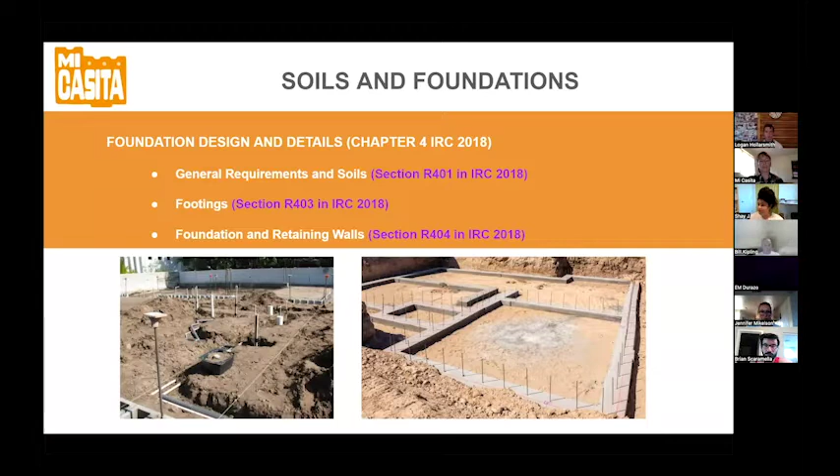So we're just going to go through this in sequence, more or less of construction, but also building code, going through the phases. You're going to start - everything you need to know about soils, footings, foundations and retaining walls is found in chapter 4. Types of wall construction are all in chapter 6. For homeowners, you don't need to know the details, but having a sense of what type of construction you want, having a sense of the basics helps with cost estimating - it just helps to have a pretty clear idea.

The more clear and dialed in you are of the picture you want will just help you understand quicker what it means in terms of cost.

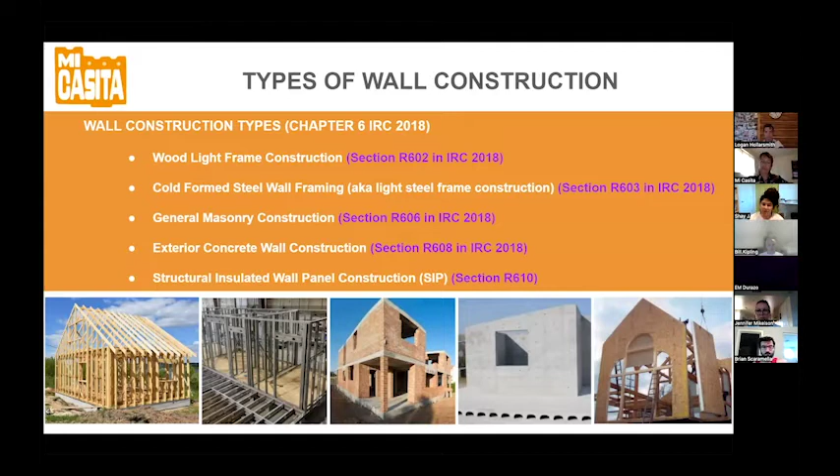For most people, the building code is arranged almost in order of expense. Wood light frame construction is by far the number one choice for everybody because it's the least expensive, the most widely used, and the system pretty much every contractor knows how to do. Anything else is going to be more specialty and a lot more expensive.

Then we have the appendices, and I wanted to mention these because there are some new updates to the code since 2012. We now have a tiny house appendix, which offers some really important relief for the building codes in terms of stairs, ceiling clearances, and lofts. It's really relevant to the casita conversation because a lot of people want to build under 400 square feet, and you really need those extra reliefs to make some of those floor plans work out.

We also have in the building code a section on light straw clay construction, which is exciting because this is a newer sustainable solution that's now allowable, at least in our jurisdiction. And we have straw bale construction also in there.

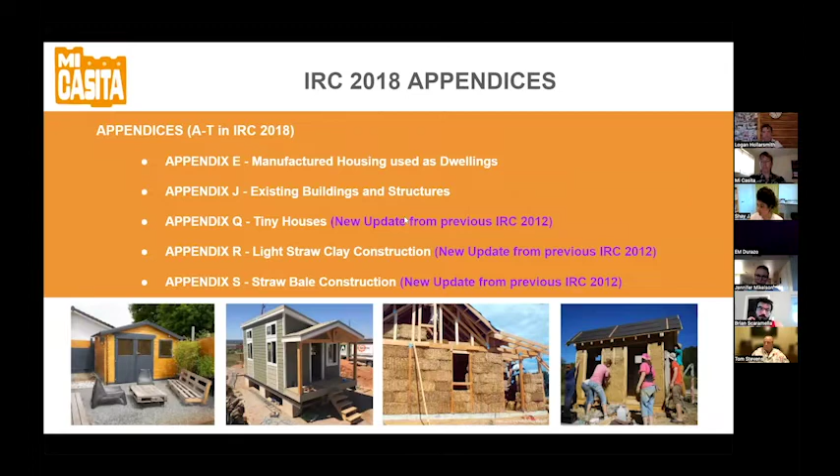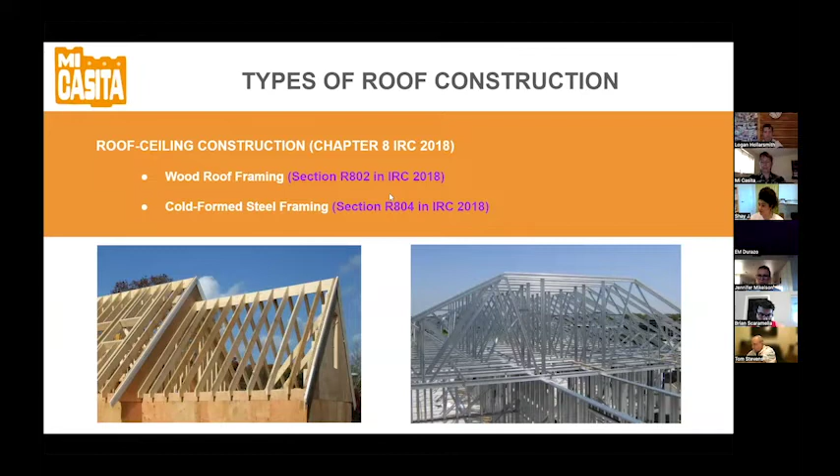For roof construction, at least in the residential code, you have the option of wood or light frame steel construction. Another really important thing I always ask clients when we're trying to nail down scope is what type of roof they want.

There are so many options available, but the least expensive is going to be the most simple. The most common in Tucson is either your gable roof, which is like the classic kindergarten drawing roof, or your flat roof or parapet roof in the Southwest style, where the walls come up and it's flat on top with the roof sitting below.

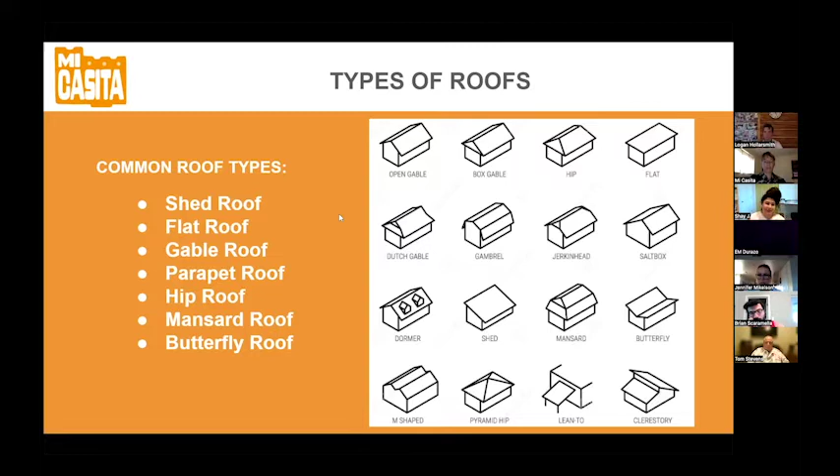Once you start getting into more angles like hips or mansard, it gets more expensive, and if you're budget mindful, it's probably not something you'll want to do. But every now and then I have clients who want something super specialty and unique, so then we'd look at those other options.

And then your construction sequencing - it's just good to have a basic understanding so you know what to expect as a homeowner, and what you're up against in terms of your site and everything that's going to happen.

You obviously start with your site grading and excavation, rough-in utilities go in, and you might want to be mindful of this if you're planning on doing the contracting yourself and need to schedule and call in inspections. This is all listed on the PRO website, and it all goes with construction sequencing.

Foundations, then you have your wall framing, your roof framing, then the sheathing goes on - this is specific to light frame construction, since that's going to probably be the most common type that people use.

Roofing - then once the building's more or less dried in, you start moving to the interior with the rough-in mechanical, doors and windows. Once the building's fully roughed in, you can lock everything up. That's when you really go into the finishes of drywall, cabinetry, carpets, paint, and all that.

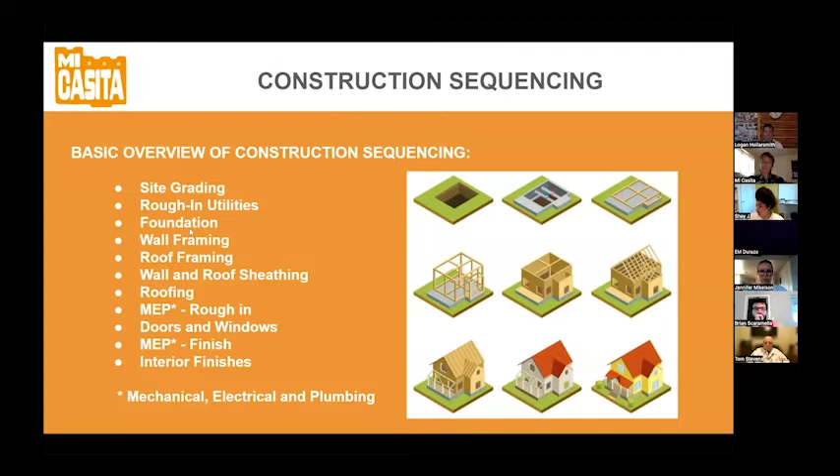And again, this pro website basically tracks the progress of your project. So whether you're a homeowner who wants to check in on how building progress is going, or you are the contractor, or however you decide to do your project, this is how you track the progress with the city.

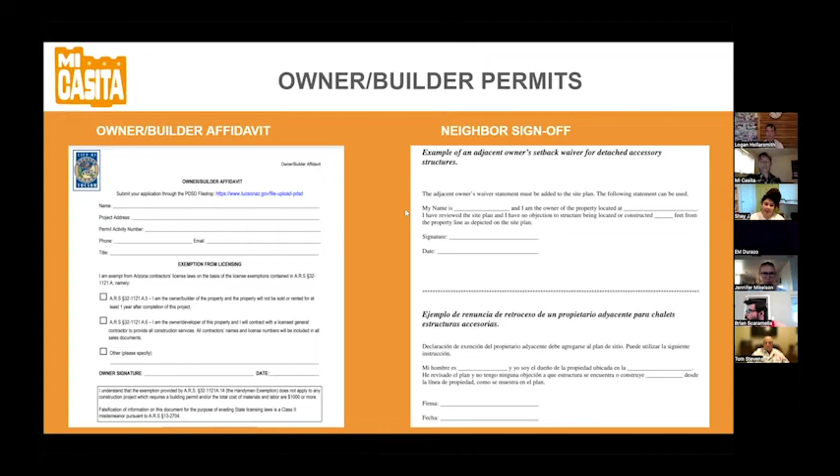Construction projects tend to be disruptive to communities, or they can be. Some neighbors find them disruptive. So it's just always a good idea to check in with your neighbors anyways. This sign off is specifically for that. And this is just a template. You could write up your own, but the city has this as an example.

And then as far as reducing cost and design, the biggest thing is to keep it simple, simple roof forms, simple plan geometry. Obviously the simplest thing to build is a box with 4 corners. You want to try to reduce wasted space in the plan. This is also really why it's great to bring in a draftsperson or architect, because they really know how to maximize your square footage and get the most efficiency out of your dollars.

Try to avoid specialty or novelty products. I get a lot of people call and ask or tell me, oh, I want to do shipping container construction. I want to, that seems like a really great idea and maybe more affordable. But in most cases, unless you're doing all of that work yourself, it's not something that is standardized in the construction industry. It's not a system that people really know how to work with very easily.

It's also steel construction, which is more expensive than framing. So if you need to modify it a lot and start adding doors and windows, you're going to have to hire a welder or somebody who knows how to work with metal, which is more expensive than framing. So it's really, you want to stick with stuff that's allowable in the building code because it's what's legal, it's what people know, and it's the easiest to get through the system. So anything that seems like it's too good to be true probably is.

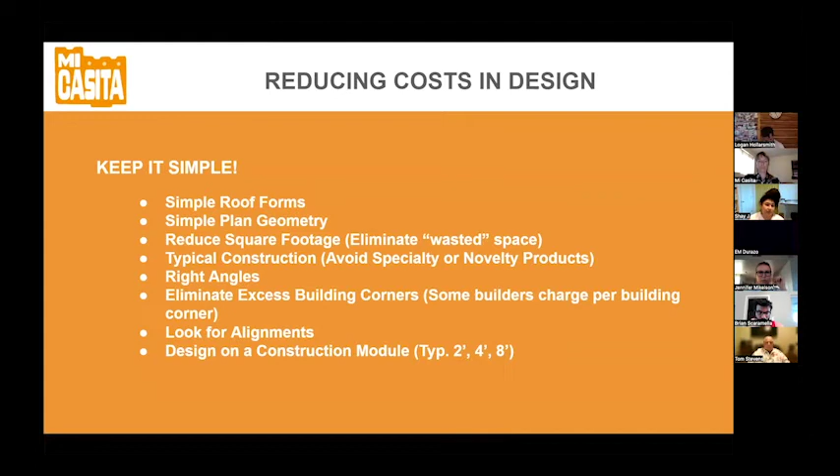And you can do it a few different ways. Sometimes people just put in a fixed rate for the line item. If you get more fancy and technical with it, you can do quantities and units and do it that way.

I've also talked to a few clients who find it really helpful to have a separate project account, especially if you're going to be spending more than $50,000. You kind of want to keep track of your budget and not get it mixed in with the groceries and the gas and everything else.

If you're hiring a general contractor, you should ask for an estimate with line items and the scope clearly written down. The biggest hurdle when hiring any kind of contractor is communication, and everyone being super clear about what the scope is, what is and isn't included, and going through that very thoroughly before you start the project and during bidding while you're getting bids.

Really the best way to do this is to have construction documents, because construction documents capture the full scope. That's why they're such detailed and exhaustive drawing sets, because you're really trying to nail down and dial in the scope. So for bigger projects especially, it's really hard to get good, accurate construction estimating without plans.

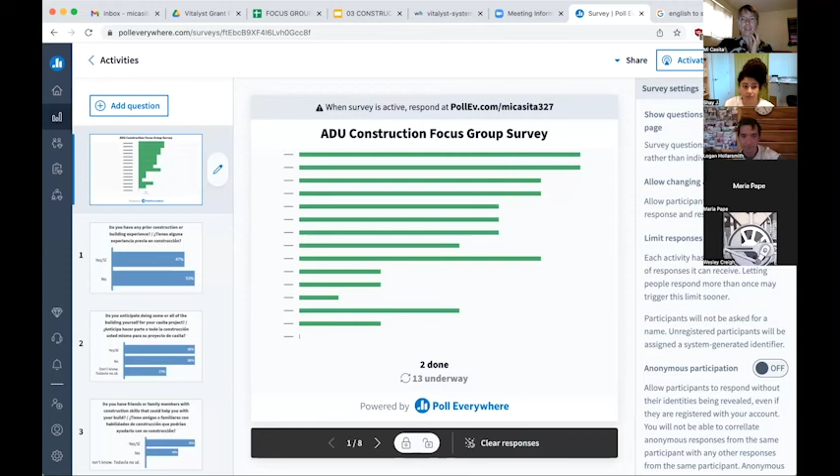Okay, I'm going to begin sharing the poll results. There we go. So it looks like it's kind of split 50-50, which is kind of what we've been noticing so far in most of our sessions with those who have experience with construction.

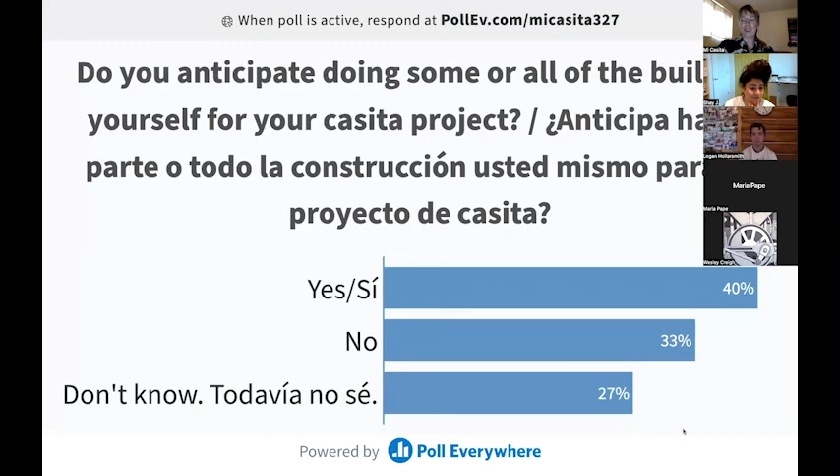Do you anticipate doing some or all of the building yourself? And some are - it's also quite split. So I'm glad we are gauging this and know how detailed our resources need to be for those of you.

Do you have friends or family members with construction skills that would help you? Yep, split again - many people do and are planning on that.